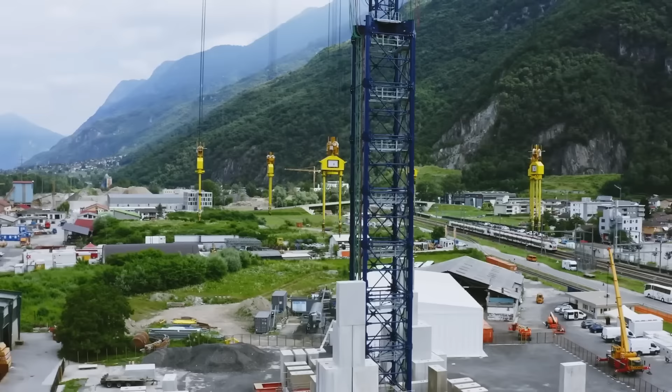We really wanted to innovate in a way so when you combine with wind and solar, you could actually be competitive and even cheaper than fossil fuel. And this really drove a lot of our innovation to come up with a combination of conventional physics technology for speed with some of the latest innovations in AI, software, and material science to create an energy storage breakthrough.

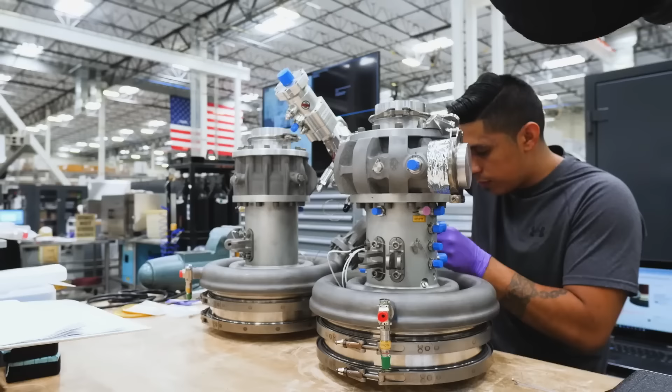A global technological revolution is underway. We think in the next 10 years, you'll see more innovation than we've seen in the past 50. Driven by passionate, dedicated individuals intent on shaping a new world. I want to create something new. I want to create something that gives me the sense of creating new life. This is why I'm here.

A greener world. This is the last call to action, that we have to develop the solutions that are protecting our planet. A better world. I have a family, and when I think about the life I want them to have and their children to have, I want them to experience the world where they can travel and live without worry, and that gets me up and going every day.

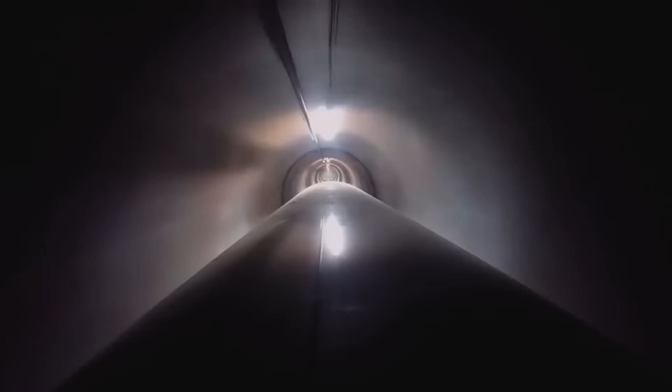Together, they are pushing engineering to its limits. Human creativity is the most tremendous power, and if you set a target, things that you never thought possible become possible. Creating extraordinary machines that can help the planet and humankind in the future.

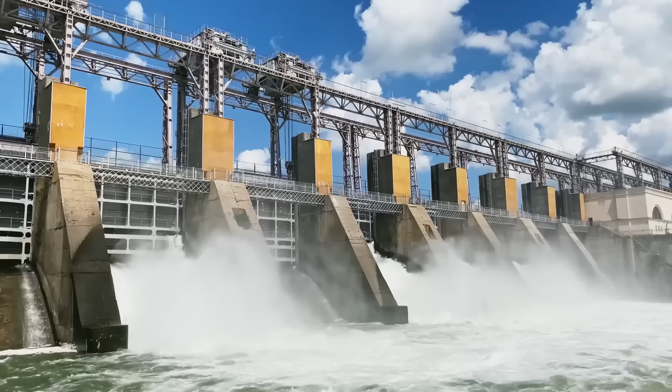Engineers are transforming the way we power the world, replacing old carbon-intensive technologies with clean, renewable sources of energy. And the speed of change is unprecedented. The energy transition that's happening at the moment is a complete paradigm shift.

Rather than big, centralized thermal generation, burning coal, burning oil, burning gas, we're now decentralized, solar PV all over the place. Wind and solar, which are now commonplace, really, they were almost non-existent. They were just a minority thing 20 years ago. But the meteoric rise of renewable energy has consequences for our electricity supply.

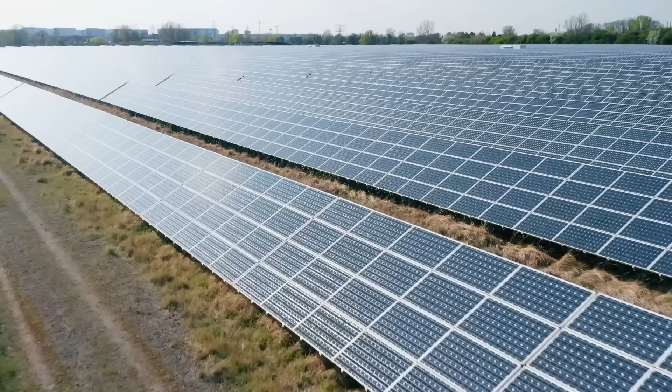While coal and gas-fired power stations can generate electricity whenever you need it, renewables are intermittent by nature. So we need a backup plan for when the wind stops or the sun goes down. So the solution to intermittent power provided by renewable energy is to provide power quickly using energy storage devices.

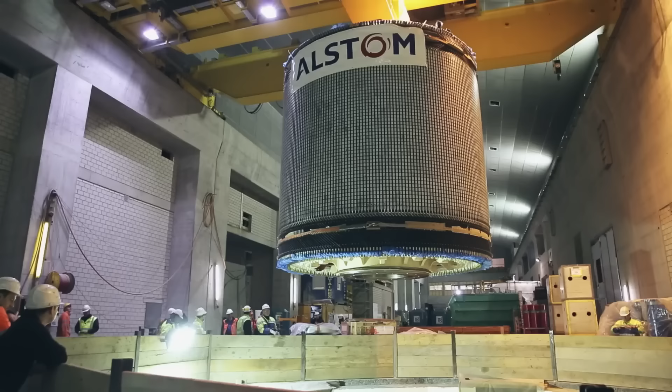Teams of engineers are searching for ways to store green energy with mechanical batteries, so that when extra power is needed, these devices can bridge the gap instead of relying on more polluting sources of electricity. The ultimate solution really is to have much, much more energy storage built into the grid, so that at times when there's a surplus of energy, such as when the wind's blowing very strongly and the sun is also shining, one can save energy and store it.

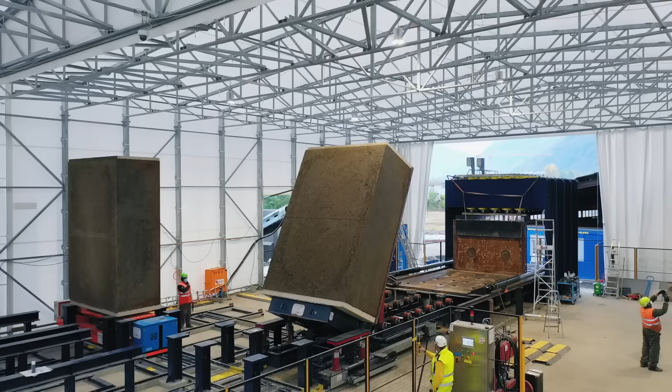We're going to need a lot of innovation for new technologies to be able to store this energy so that renewables can generate and we can utilize that when the grid needs it, when the demand is. The success of the green energy revolution depends on these engineers and their marvelous machines.

If we were to keep increasing the amount of renewables on the grid, but we didn't implement energy storage at the same time, our grids will start to get unstable. We'll start to have more and more frequently periods where power wasn't available to us. Already, there are ominous signs of what a future might look like without enough energy storage.

In August 2020, California was about to experience a glimpse of this potentially devastating future. The most extreme heat wave of recent decades was wreaking havoc on the western United States. Elliot Mainzer, CEO of the California Independent System Operator, was paying close attention to the weather.

August of 2020 saw a heating event that hadn't been seen in many, many years. It was simultaneously extremely hot in just about every part of the western United States, with temperatures well into the 100 degrees in California and in many parts of the region. It was what we've referred to as a heat dome that sat over basically the entire western United States.

Then, sweltering Californians were suddenly confronted with another rare event. From 6:30 p.m. on the 14th of August, their electricity was suddenly cut off. It was the first time that California had experienced any types of rotating outages from a shortage of electricity in 20 years. This shortage may seem surprising, as California has invested heavily in green energy generation.

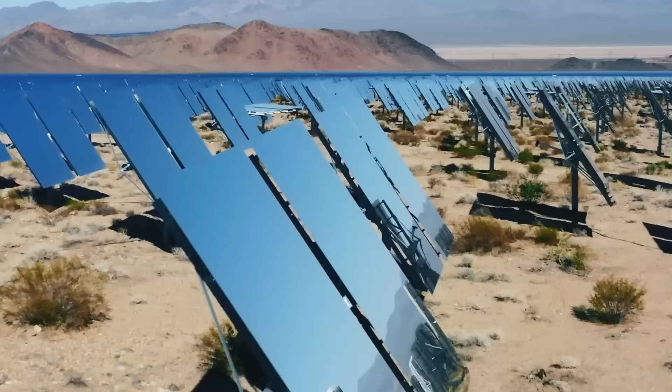In fact, during the spring, they have so much solar power, they export it to neighboring states. California is, first and foremost, very blessed to have a very significant solar energy resource. We have over 15,000 megawatts of solar operating on the high voltage grid, and also behind the meter, a lot of rooftop solar in California.

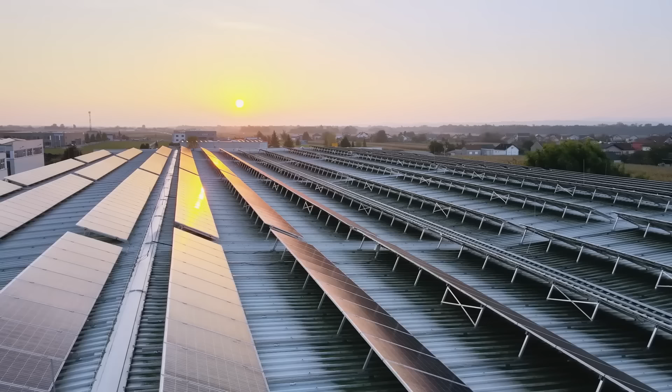So, with enough solar panels to power nearly every household, why did California run out of electricity during a heat wave, when there was plenty of sunshine? The answer was all in the timing. As the sun went down, power-hungry air conditioning systems stayed on, so the supply of solar power fell while demand for electricity remained high. In the evenings, California often imports surplus electricity from neighbors, but this time, they couldn't rely on other states.

It was so hot in these other areas that they needed that electricity for their own customers and didn't have as much surplus to sell into California. And that put us into a really stressed situation during a time of the day when we simply don't have enough capability to ride through those types of conditions. Planned energy shutdowns were the only solution. The result was hours of blackouts for 2 days, affecting nearly 500,000 people.

If California could have stored more of the solar power generated during the day to use in the evening, the crisis could have been averted. When solar panels produce more electricity than is being used by homes and businesses, the surplus energy can instead charge batteries. Then, when solar panels are generating less power than is needed, the batteries can discharge their electricity to the grid, making sure there's always enough for everyone.

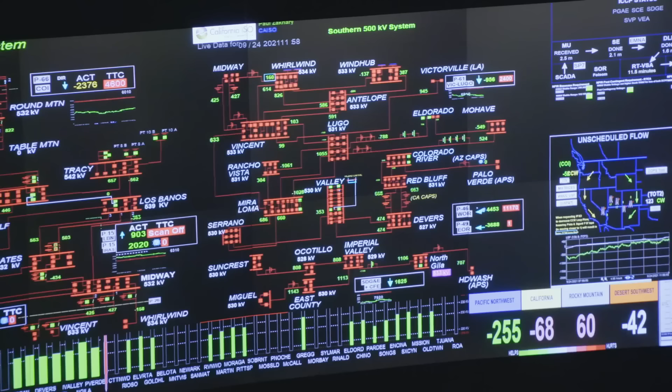The state's capacity has increased tenfold to 2.5 gigawatts. But Los Angeles alone uses 6.5 gigawatts. And lithium batteries can't provide power for long enough to get through the night. We are going to need longer duration storage. You want a diversity of supply. You don't want to have such a dependence on a single technology.

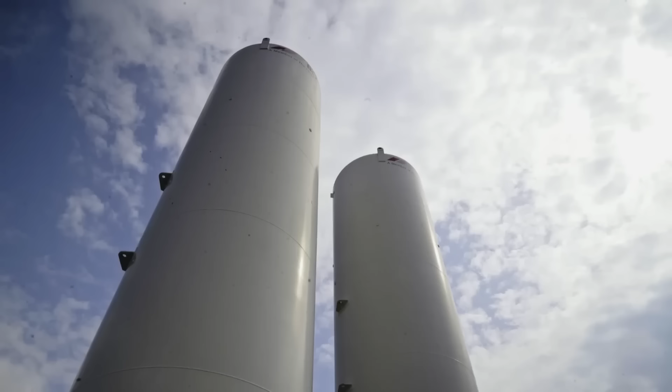California is ahead of the curve. But all over the world, renewable energy is growing fast. Without a revolution in energy storage, the world faces mass blackouts. Electricity grids need energy storage that is cheaper than fossil fuels to be competitive. They need them to be long-lasting to provide power for days or even weeks. They must also be fast-reacting to respond rapidly when the demand spikes. But above all, they need to store vast amounts of energy to help the world switch over to renewables.

One nation that's attempting to build a giant energy storage system is Switzerland. The Alpine country boasts over 600 hydroelectric plants. But this know-how in capturing energy from water is being taken to the next level here at Limmern Dam, to build a huge water-powered gravity battery known as a pumped storage plant. Deep inside the mountain, a turbine hall will connect Limmern Dam to Lake Muttsee, 1.5 miles above sea level. A 2,000 feet difference in height between the two reservoirs will allow them to store energy.

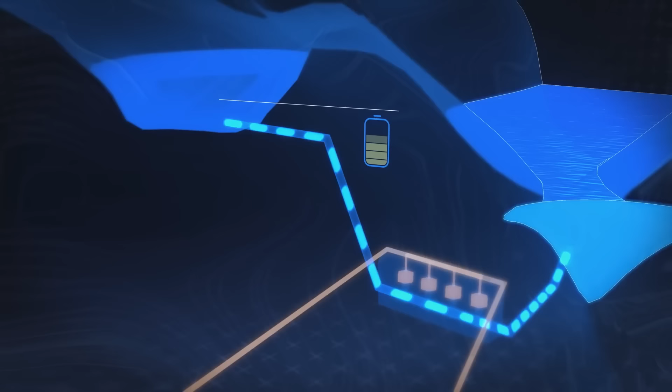When there's surplus electricity available, the gravity battery can be charged by pumping vast amounts of water upstream to fill up the lake. The gravitational potential energy of the water in the upper lake can be released to generate electricity whenever it's needed. The pumps will then rotate in the opposite direction, acting as turbines, generating electricity and sending it to the grid. The engineers aim to generate enough electricity for the Limmern Dam to supply up to 1 million Swiss homes at peak power.

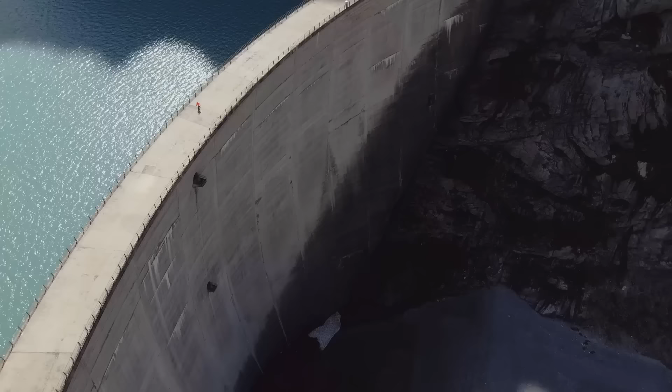In January 2010, energy company Axpo started building one of the biggest batteries in the world. The project would be one of the most ambitious engineering feats ever attempted at such a high altitude. Overseeing the construction of this vast pumped storage plant was project manager Martin Hussler. This was a huge work which has to be done with a maximum of 700 people here, and they work together. It was a huge construction site.

With no road access permitted to this protected part of the Alps, the engineers had to find a solution to lift all the necessary building equipment to the top of the mountain. So the team built 2 cable systems, each spanning just under a mile, that could lift the equipment at 10 miles per hour.

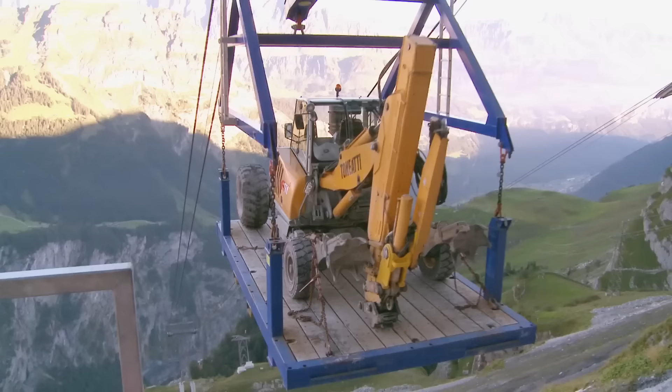We had 2 aerial cableways. The first cableway has a capacity of 40 tons, and the second cableway has a capacity of 30 tons. And all the machinery was taken by the aerial cableways to the Lake Limmern and to the Lake Muttsee.

Next, they had to dig through a wall of rock to the center of the mountain. Boring machines excavated a 2-mile-long access tunnel through which the team could bring the equipment from the top of the cableway. Then the team used explosives to excavate the caverns before collecting up the rubble to make concrete for the project.

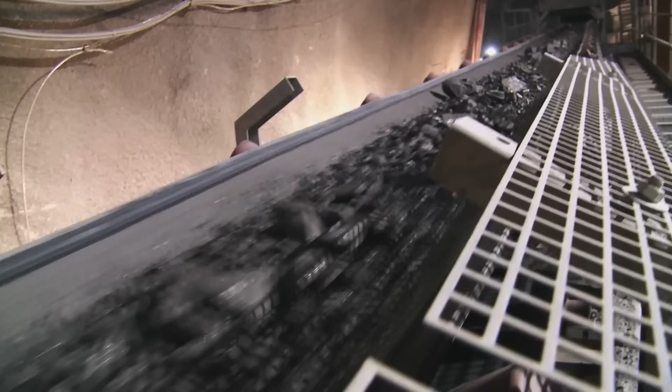The rocks were excavated from the caverns, were crushed and prepared for the concreting, because this was the main material for the concreting of the liner in the cavern. The builders produced enough concrete to build 700 suburban homes, and even more concrete was needed for the dams.

Most of this crushed stone was transported with the aerial cableway to the Lake Muttsee and was used for concreting of the gravity dam. This structure will be the longest in Switzerland, and it will triple the capacity of the lake. The altitude of the dam is 2,500 meters approximately, and this is the highest in Europe. So this was also a logistical challenge.

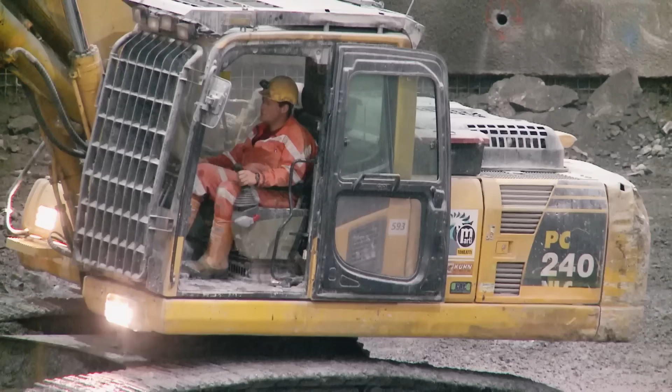The team had to excavate 2 main caverns out of solid rock. A powerhouse cavern for turbines and generators, and a second cavern to house the transformers. Then they had to line both caverns with concrete and build arches to reinforce the structure to withstand the weight of the mountain above them.

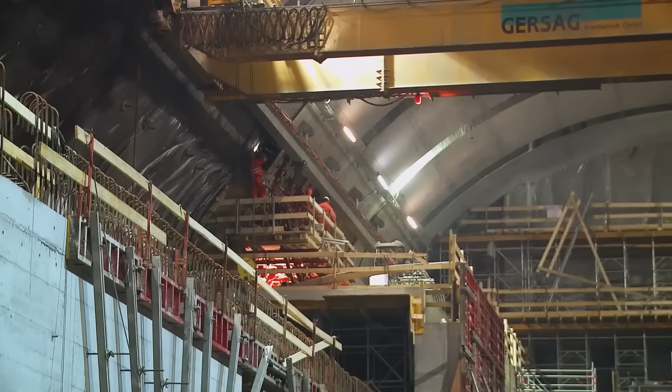The whole plant, with all the tunnels, was approximately 400,000 cubic meters. And as a comparison, our main cavern is approximately 15% larger than the interior volume of St. Paul's Cathedral in London.

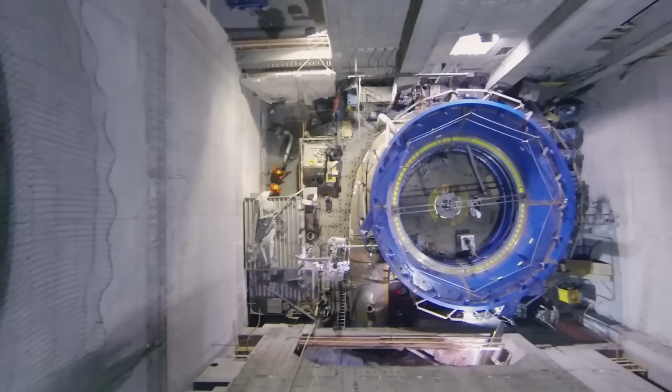The cavern was finally ready for the transformers to be installed, but there was an issue. They weighed over 200 tons, which was too heavy for the cableway. The solution was for the engineers to fit a funicular rail system into an access tunnel, which could lift up to 220 tons. Then the team built 4 pits for the turbine and generator units. These would weigh too much for even the funicular, so instead they meticulously assembled them in situ.

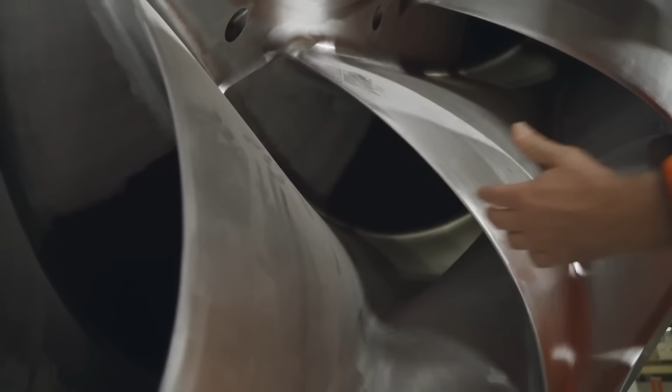First came the enormous pump turbines. As these blades rotate, they transform the kinetic energy of the water into rotational energy. The runner has a power of 250 megawatts, and its design has 9 blades. And in pumping operation, the runner turns in this direction, and the flow goes through these channels and goes to the Lake Muttsee to store energy. This allows to fill Lake Muttsee in about 40 hours.

In turbine mode, the water is coming from the Lake Muttsee, going through these channels, and the water flows through this channel out and is going to the Lake Limmern. And for all 4 runners, we have a total discharge of 160 cubic meters per second. That's enough to fill 4 Olympic swimming pools every minute.

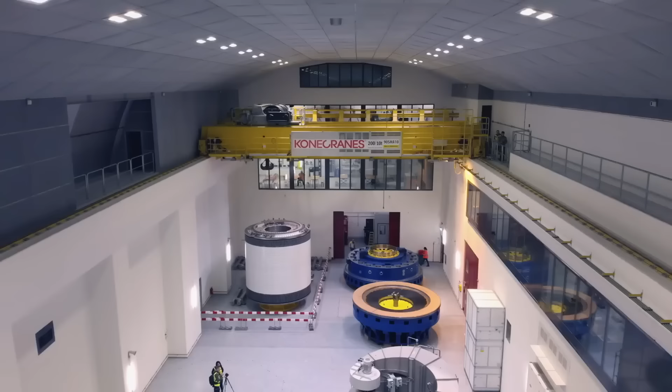The feeling after we have successfully done the project was great, of course, because this is a huge project. It takes a long time to fulfill all these requirements, and we are still working on it. It can now provide a massive 1 gigawatt of power on demand, the equivalent of a typical nuclear power plant.

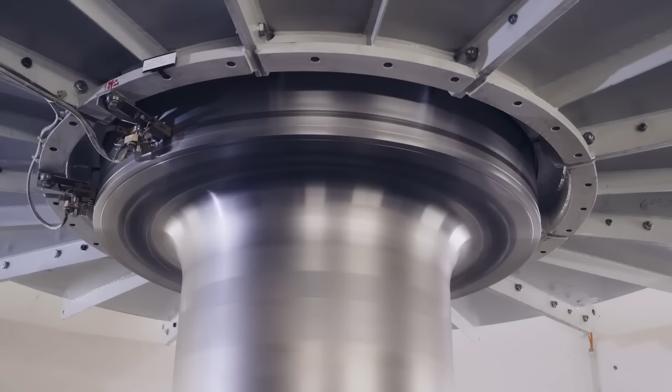It is very important to have this pump storage power plant because we are able to store a large amount of excess electrical energy produced by solar and wind power. The Limmern Energy Storage Plant can provide Switzerland with green power even when the sun or wind drops.

Pumped storage gravity batteries like this were first developed here in Switzerland in 1907. Today, they're the leading form of energy storage worldwide, with some of the biggest in the US and China. But they take a long time to build. So as renewable energy grows rapidly, other solutions will be vital.

Pump storage is near its limits now for several reasons. The main reason, of course, is that you need a convenient mountain, and convenient mountains usually don't exist anywhere near centres of population where storage is most needed. It also has other problems in that most pump storage systems are quite slow response. To get a lot of water flowing takes time.

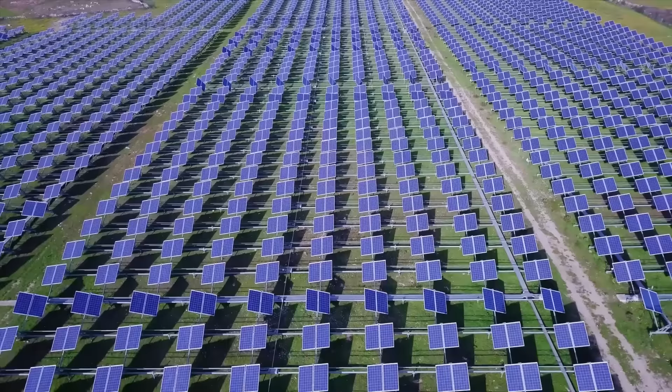So some of the grid services which are needed demand something which can respond in under a second, for example, and certainly a pump storage system can never do that. The supply and demand of electricity can change very suddenly, such as the power from a solar farm when a big cloud drifts overhead. So in order to keep the grid stable, engineers must build systems that can respond rapidly.

Inventor Peter Fraenkel is a pioneer of renewable energy, creating novel wind turbines and the world's first commercial-scale tidal turbine. So he's well placed to understand the need to solve this problem.

I decided I'd like to get into energy storage, and I was looking around for some clever way of ideally using mechanical engineering of storing energy.

Peter was fascinated by the mechanism inside a grandfather clock in his home similar to this one, a family heirloom. Basically, it has some very heavy weights, and those weights, under the influence of gravity, would like to fall down, but they can't because they're hanging from wires connected to the mechanism. So if I put the key in and wind the handle, this slowly raises the weights, and the energy from my muscles goes into the weight, and the weight then will be energized, basically, and ready to return the energy to the clock.

This clock is 300 years old, and actually you could leave these weights for another 300 years if you did nothing else, and no energy would be lost. But if we start the clock, so the pendulum swings, now the clock has started to tick, and both the weights, in fact, will slowly descend. So, you know, it's an incredibly durable form of energy storage.

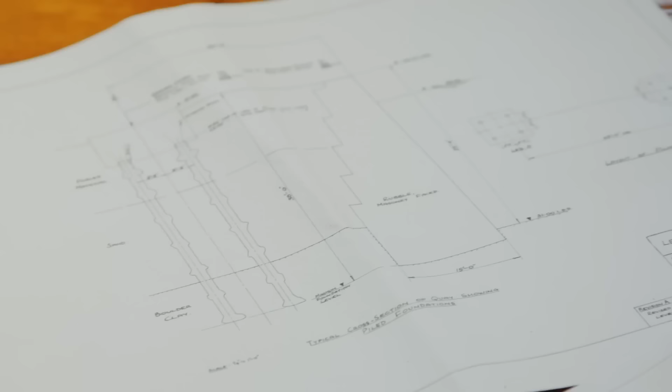Peter appointed engineer Miles Franklin to oversee the project in Scotland, as he had to self-isolate in London. To store a lot of energy, you need either a lot of mass or a lot of height. So in order to get to very interesting levels of energy storage by lifting masses, it's good to go down. It's also then, once it's underground, it's hidden. So you can do it under a city, under a football pitch, wherever you liked, in order to store energy, and then without having problems with wind and weather and all these other things.

And so we started to look at both existing mine shafts that are no longer being used for mining, and also the idea of sinking new shafts specifically for energy storage.

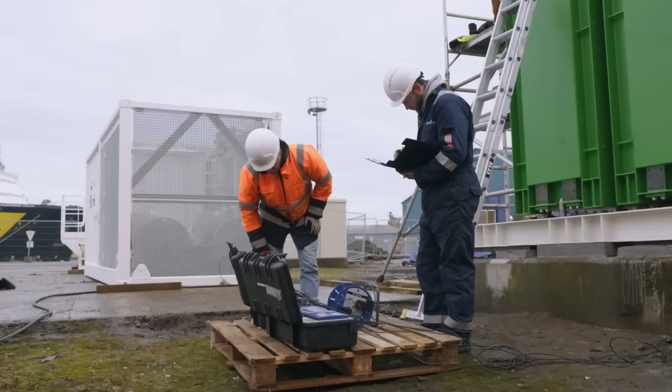Before going underground, Miles was in charge of building a tower prototype to prove it could provide power rapidly. The team filled 2 steel containers with over 50 tons of high-density ballast. This would store energy when lifted up and release it when lowered down. The 30-foot tower was then lowered onto the containers and secured.

There was some scary moments along the way when we're moving very heavy things and lifting them, so there's a sigh of relief when they're all in place.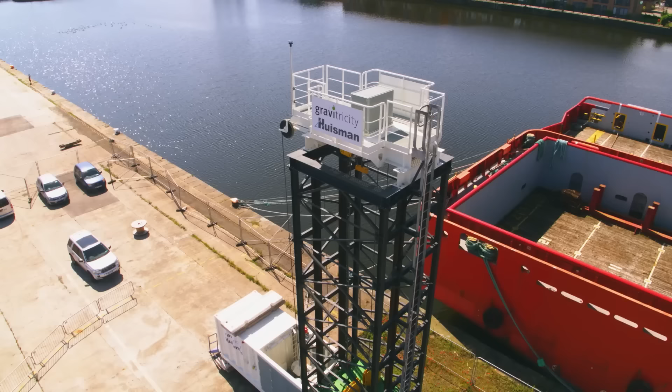Once it was all assembled, they were ready to store energy for the first time. We got to the moment we were going to lift the weights. We had quite a lot of the engineering team on site. So yeah, there was some tension.

They used power from the grid to raise the weights and charge the system with energy. For that lift, it's the first time that the whole structure is supporting the weights. And you'd expect, as you lift, some strange noises as the structure kind of finds its place.

When the weight reaches the top of the tower, the system is fully charged. We can stop, we can pause, we can hold that energy for as long as we want. But how fast can they return power to the grid when it's needed?

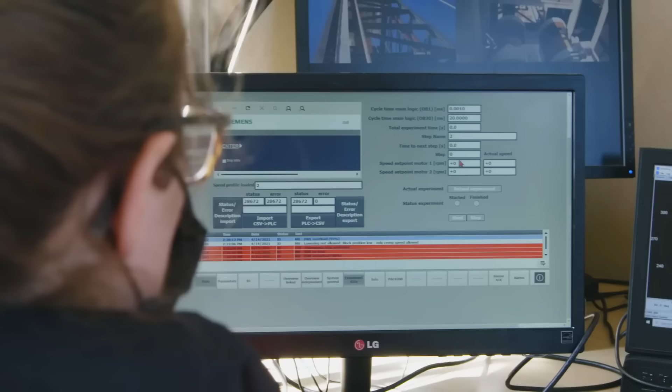Senior test engineer Jill McPherson knows how important that is. Right now we're going through a transition from using fossil fuels towards using renewable energy to generate electricity, but that means that the grid is less stable. With conventional power, we have these big generators that provide a lot of stability to the grid, but with renewable energy devices, they don't really provide that.

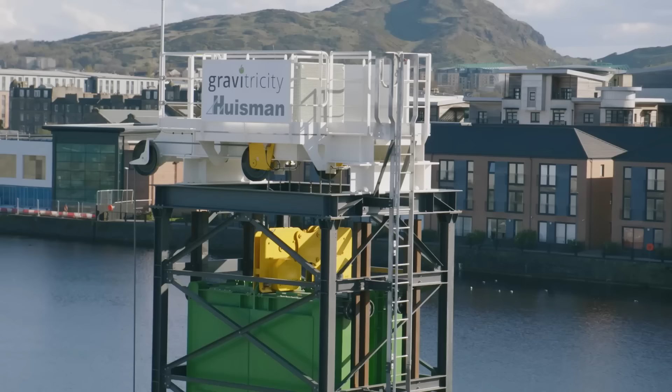Sure, we wanted to be able to go from 0 to full exporting power within a second so that all the devices on the grid can operate safely. All systems are go.

To generate power back to the grid, the weight is lowered, which pulls down on the steel rope, turning the winch, and then via the gearbox, turns the motor. The motor acts as a generator, putting power back into the electrical cable via the power electronics, straight into the grid.

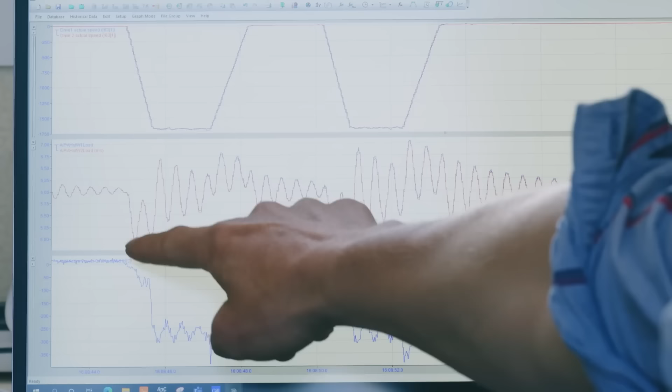The tower had successfully generated electricity, but for the first few seconds, the power supply had fluctuated too much. When we accelerate really quickly, the weight starts to bounce up and down, and that bouncing weight becomes a variation in the power. So what we need to do is find solutions to accelerate really quickly but have that power output from our system quite smooth. We need to find some way to fix that.

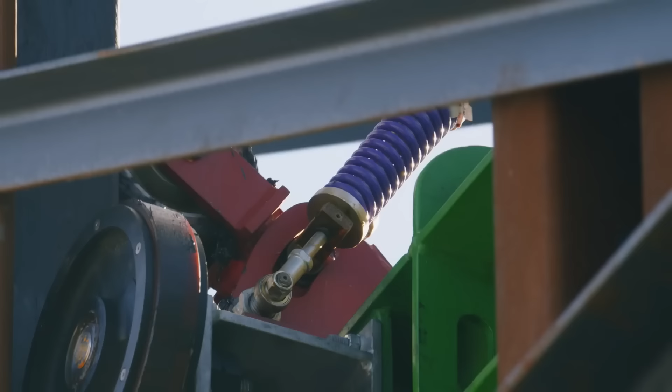The team must find a solution to generate a smooth power supply more quickly when the weight starts to drop. Although the concept may seem simple, smoothly lowering a weight of 50 tons in a fraction of a second involves intricate mathematical modeling. Analyzing the dynamics of the weights and the movements and then designing them is actually quite complex, and that was something that took us a while to get right.

One month later, Miles and Jill have a plan. After many simulations and tests, it's clear they think they've figured it out. Okay, so 3, 2, 1, go.

If we want to go from 0 to full power but have smooth power at the maximum power, then what we could do is apply a force that cancels out the tension oscillations in the cable, and that corresponds to smoother power.

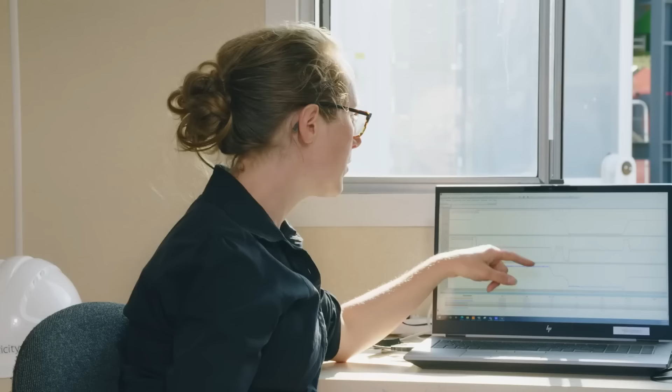To find out if it produced a useful source of power in under a second, they must analyze the results. In this last set of tests that we just did, you can see that the power is much more smooth, it's a straight line, and that's what we're looking for. We went from 0 to full power in 0.96 seconds.

Gravitricity's prototype has proven it can respond rapidly to the demands of the grid, a significant improvement over pumped storage, which can take minutes.

In July 2021, Peter Fraenkel was eventually able to make the long journey from London to Scotland to see the tower for the first time. A bit better than a grandfather clock, yeah. It doesn't have such a nice face on the top of it, but yeah.

Now that this prototype has proven his theory, Peter has big plans for the next stage of his energy storage system. In the near-term future, I think we're looking at initially systems a few 500 meters deep and 6 meters diameter. So it's like a railway tunnel turned on its side, vertically.

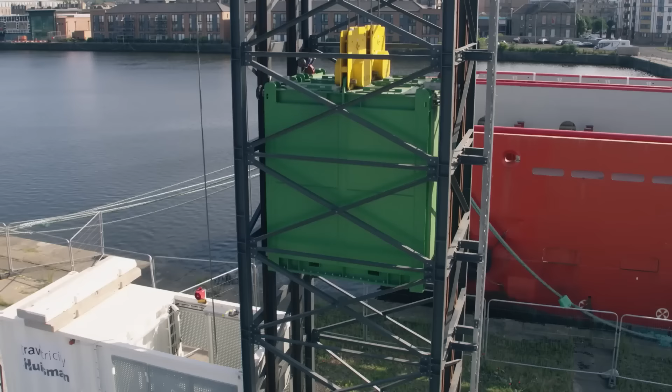We hope and expect that gravity-based energy storage of the kind that we're trying to develop could have a massive impact in terms of facilitating the wider use of intermittent renewables. A typical system would store enough electricity to supply 13,000 homes for 2 hours. Gravitricity hoped to build their underground mechanical batteries all over the world to store green energy.

Meanwhile, back in Switzerland, a startup called Energy Vault are building another type of gravity battery. The goal is to store energy as cheaply as possible.

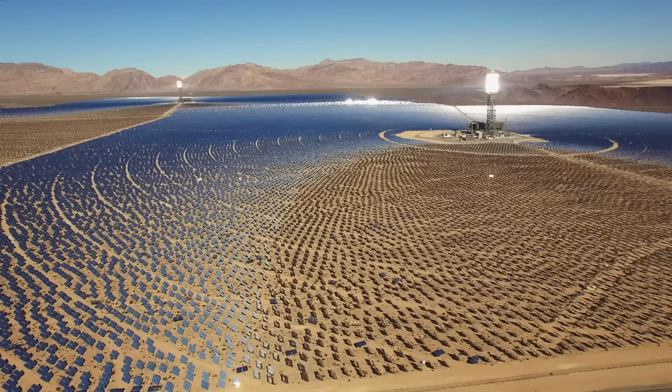CEO Robert Piconi understood that the only way to move to 100% renewable power was to undercut the price of electricity generated by fossil fuels. You have to be able to essentially compete with something that's about 5 to 6 cents a kilowatt hour. And the good news is solar and wind now is just a few cents, 1 to 2 cents a kilowatt hour, so the economics really work there. You therefore have to target storage that must be between 3 and 4 cents to have something that is at least on parity with fossil fuel, and therein lies the challenge.

To meet this challenge, the team came up with a specific design: the Energy Vault 1, a crane with 6 arms that could lift heavy bricks and stack them on top of each other to store energy.

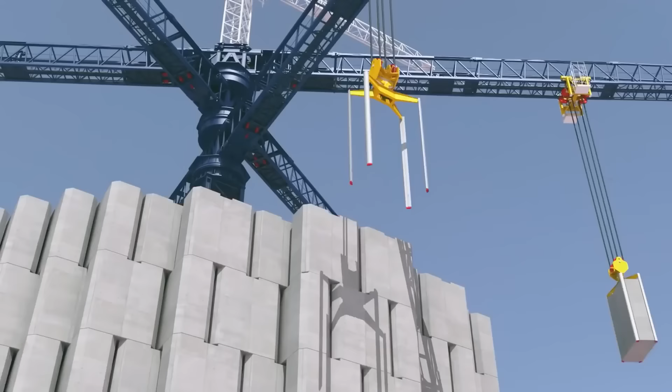Then, to release that gravitational energy, the cranes lower the bricks back to the ground one by one. By building a tower made of thousands of heavy weights, they could store large amounts of energy and therefore bring down the cost. And by using mostly tried and tested machinery, they could build it quickly.

But first, they had a thorny issue to tackle. So they built a quarter-scale system to try and find a solution.

The problem is that when heavy objects are lifted by a crane, they can swing like a pendulum. One of the main challenges we have in utilizing the system to move large objects is the environmental impacts on that object in movement. It's a very important problem when you're moving large things like containers at ports, where cranes moving them will sway and impact the ability to precisely place them. When we're moving around 35 metric ton bricks that we have to stack at height, it's very important that we be quite precise. So that was one of the major challenges, to solve for this pendulum effect.

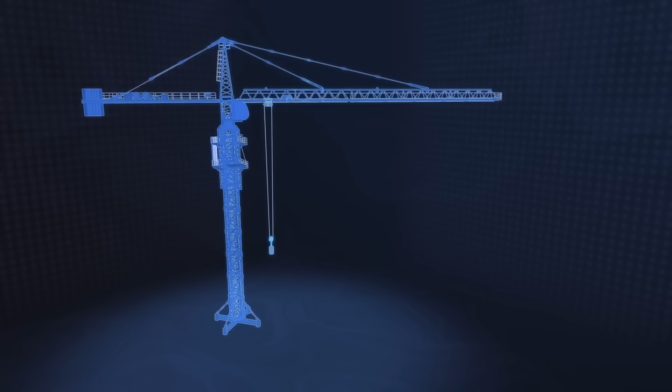When the trolley on the crane moves along the arm, the weight below starts to swing back and forth, making it almost impossible to precisely place the weight in its new position.

We had actually thought that the crane industry had solved this already for the movement of things in the ports and these large containers, but as we talked to other partners and suppliers in the space, it hadn't been solved, so we had to develop the algorithm ourselves. It's a very important algorithm because it's not only necessary for the precision placement of the brick, but also to deal with any unpredictable weather events, like a high gust of wind. So this was fundamental that we use software to solve this.

So we took concrete barrels and utilized an existing crane that we modified to test the ability of software to cancel this pendulum effect.

As the test began, an AI control system could predict how the weight was about to sway. It then instantly adjusted the movement of the trolley to cancel it out with an equal and opposite motion.

One of the most fascinating things is to focus on the trolley and see the back and forth movement at high speed so that the concrete barrels maintained consistent velocity. It's amazing to see that software at work, manifesting itself from the modeling to reality.

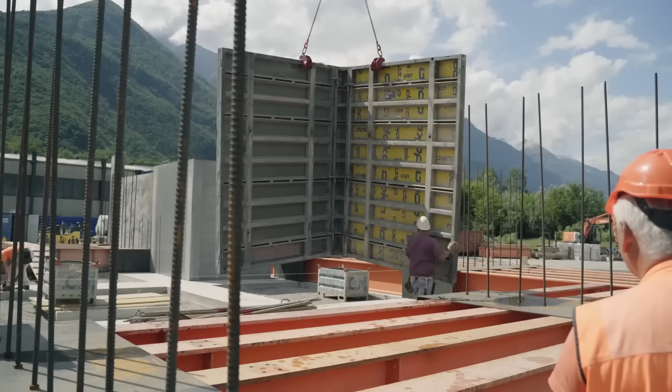In January 2021, work began on building the full-size crane. But this would be nothing like the cranes you might see at a construction site. After laying extremely strong foundations, the team assembled and secured the 7 sections that made up the 660-foot-high tower.

In the meantime, another team assembled the 3 rotating platforms called jibs. Just one jib of the crane weighs 130 tons.

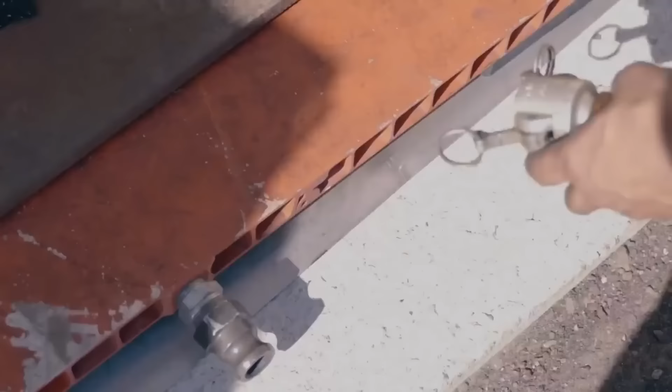So just to construct it is one thing, but then to maneuver it around the site, we had to use a special horizontally designed hovercraft system that could maneuver and shift it from the shelter where it was constructed to a location where the crane, the 600-ton crane, could be attached to that system and lift that jib up so it can be constructed onto the crane itself at height. Just fascinating and amazing, and a great job by the team to pull that off.

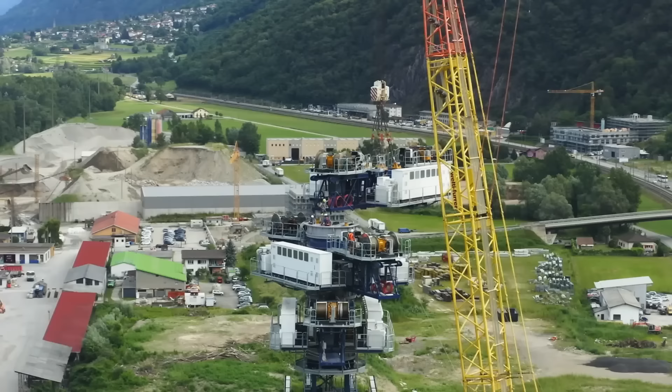The crane stacked the jibs on swing bearings on top of each other so they could turn independently. Once in place, it was time to assemble the arms which support the transport trolleys.

Having enough arms of the crane with enough megawatt motors per arm, you could generate up to 5 megawatts of power and be able to essentially discharge that over a period of time, at least 6 hours, but ideally up to 8 to 12 hours, in a way that could be reliable.

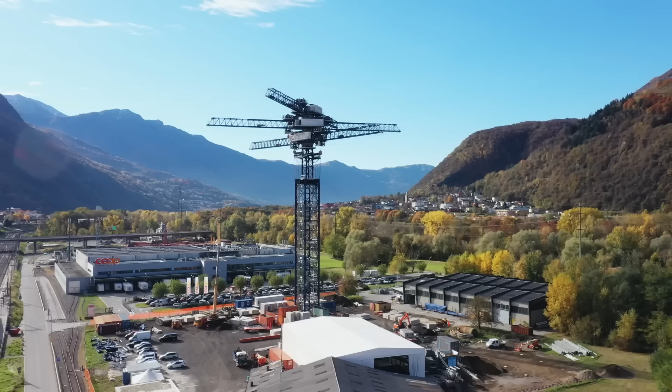While the multi-armed crane took shape, Rob faced a dilemma over how to make the 35-ton bricks in a way that was both cheap and environmentally friendly.

So normally, as you think about making any dense weight object, one of the easiest materials to use is concrete. The problem for us with concrete was many things. It was too expensive, and it was also bad for the environment. Concrete production still represents 7 to 8% of greenhouse gases. So this again required more innovation for us to solve that problem.

They wondered if the solution might be a low-cost, plentiful material available at almost any site. Soil.

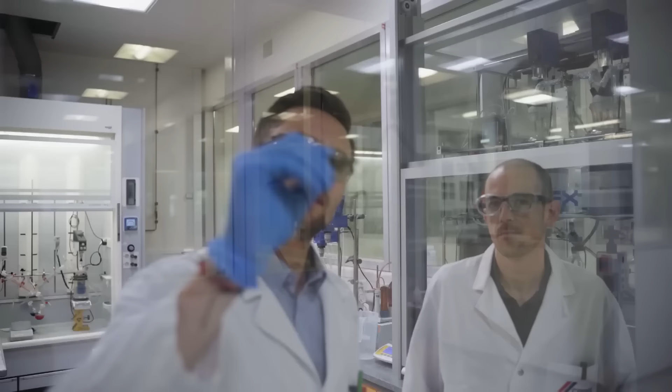So Energy Vault approached a specialist in building materials, Cemex, to develop and manufacture their bricks. We had been working already on soil stabilization for some time. There are a lot of places where there are plans to develop networks of roads, sometimes in very difficult places. The easiest way we thought was to be able to take just the soil there, dig it out, compact that material, and give it the ability to solidify.

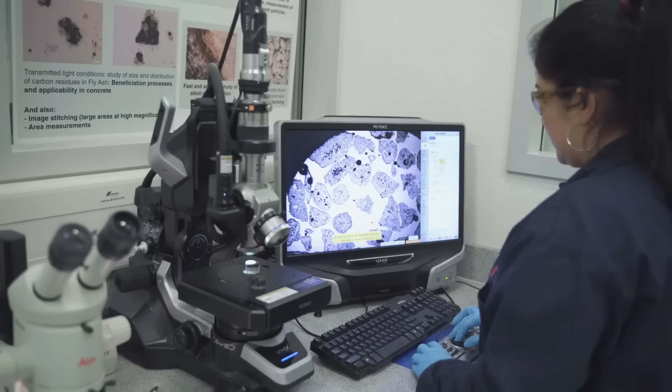To make the bricks, head of R&D, Davide Zampini, would need to adjust their process to make them even tougher. These blocks have to be designed to last 25 years or more, and the conditions that the blocks would be subjected to are highly variable.

I mean, you can have places where it's very hot, very cold, wind. These blocks are being lifted and put down, lifted and put down. So they go through a lot of cycles of stress.

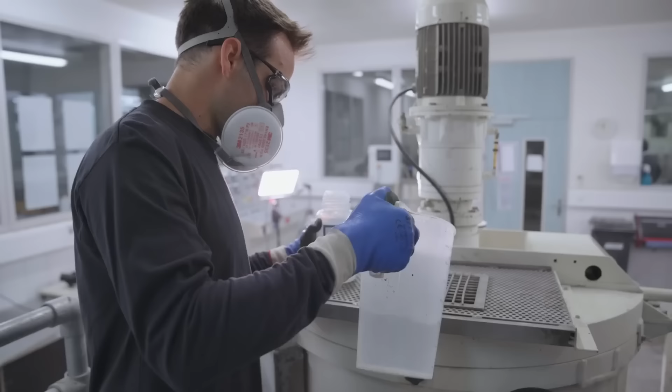Cemex came up with a mixture of soil, water, a small amount of cement, and two crucial binding components. First, a chemical glue. In terms of the strength, it has a lot to do with our chemical admixtures. Creates a strong binding element, what we call like the mineral glue of the block.

The second component is glass fibers. Fibers are actually incorporated as a means to arrest any initiation of a crack that could take place. What we do with the fibers is make the material highly resistant, especially when it's under tension.

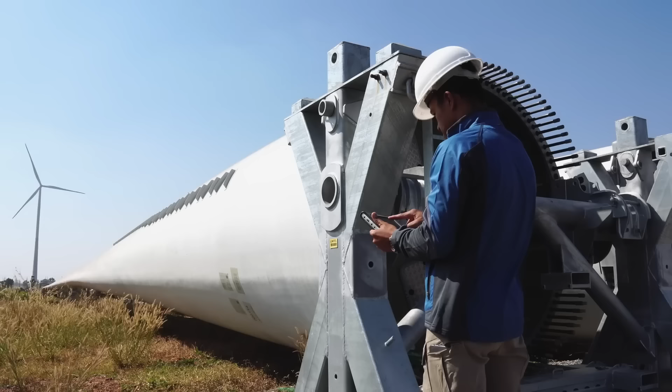Cemex are now investigating an alternative source of fiberglass that could be even more environmentally friendly. Today we're looking at recycling the blades of windmills that create energy, so it's interesting now that the same element that is creating energy has to be obviously decommissioned, and we can recuperate the blades and process that material and actually incorporate it into the blocks.

This mixture is greener than concrete as it contains much less cement and avoids the pollution caused by heavy transportation. And crucially, it's also cheaper, which ultimately means a lower price for stored energy. But to make the bricks strong enough to be stacked 500 feet high, they needed one more step.

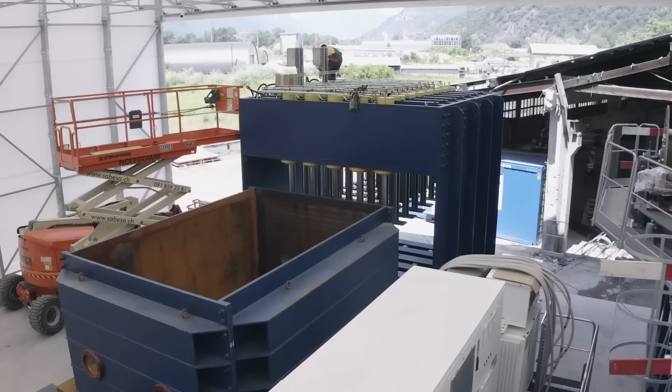When you are paving a road, you use a roller compactor. And here, actually, we said, okay, we would use the same approach because compaction is the best way to densify and make a material strong. But we needed to process the material in a different way.

And that means we had to find a way to compress the material as much as we can, because the compression and the way the chemicals work further elevate the strength and the densification properties of the material, which are required to have the block survive those different conditions. The pressure is applied by a custom-built machine with 40 powerful hydraulic pistons.

You need a compressive strength of almost 7,000 tons. If you think about the weight of a car that's about 1.5 tons, and you were to stack the amount of cars needed to generate 7,000 tons of force, that stack of cars would be as high as Mount Everest.

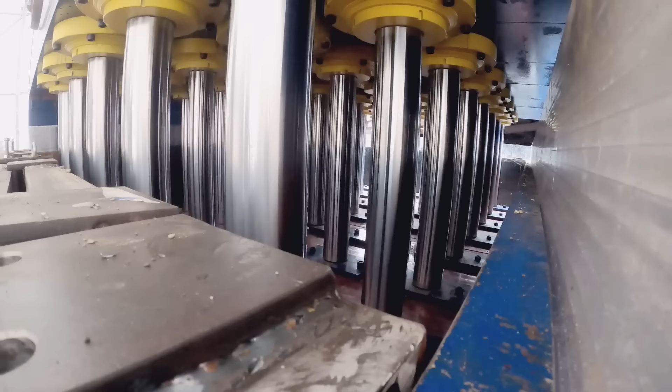After 10 minutes of this immense pressure, the bricks are good to go. Once part of the system, each one will be capable of providing a megawatt of electricity while being lowered by the crane, enough to power over 2,000 homes.

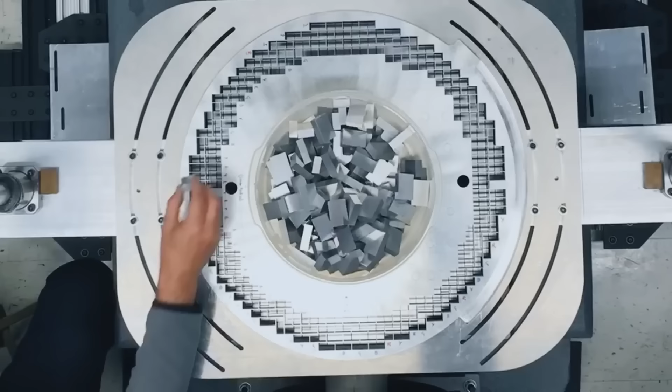But before they stack the blocks into a tall tower, Rob needs to be sure it will be safe in all conditions. One of the parameters in our design was to be able to build this at scale almost anywhere. But there are locations where there's a strong need for renewables that happen to coincide with some seismic activity, like in California. And because of that, we wanted to do another focus around research and science to deal with the occurrence of seismic events. Energy Vault teamed up with Caltech and UC San Diego to put the structure through its paces.

After some small tests, they built a 1:20 scale model, 50 feet high, 7,000 bricks carefully stacked on top of the biggest shaker table in the US. You can imagine the atmosphere in the room as we had the tower constructed and we're about to turn on the shaker table. A lot of anticipation. The giant shaker table precisely simulated the 7.1 magnitude Ridgecrest earthquake that hit California in 2019.

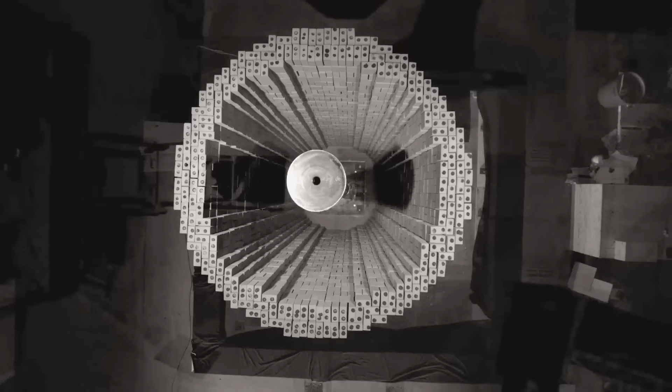As we got into the earthquake, what we saw is a vibrating of the system and a shuffling of these bricks, but the system never decoupled from the bottom and resulted in a full collapse of the system. Just this tremendous round of applause in the room because our software modeling and prediction was actually going to be correct.

So as we reconstructed the tower, we did hit it with a larger earthquake, the Denali earthquake, which is up in Alaska, that was a 7.9 on the Richter scale. Only a handful of locations around the world have experienced quakes as powerful as this. None in California have been stronger. While we were hoping that maybe it might withstand that level of earthquake, it did collapse pretty readily.

Nevertheless, the tests had proved the structure could withstand the vast majority of earthquakes, which many conventional structures couldn't do. The implications for science and civil engineering of the fact that you could have a discontinuous structure not connected with standard mortar that could respond in a seismic event and shuffle and move and dissipate that heat and energy from a seismic event and therefore withstand better than existing structures was just a tremendous impact we felt like we were having, well beyond even our energy storage structure.

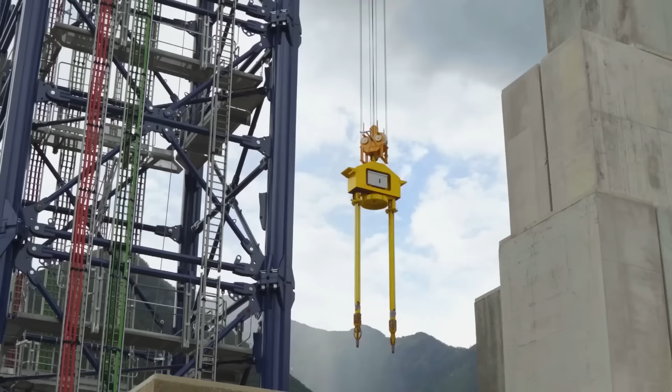With the safety of the system beyond doubt, the team were ready to stack the bricks. The holes allow the cranes to lift the bricks securely. Just amazing to see a 35 metric ton object coming off the ground and going at height 50, 60, 70 meters in the air. And not a new thing in terms of that amount of weight being lifted, but to have that done in an automated fashion and in a way that is going to be storing energy for the first time. So in this application, pretty cool to see.

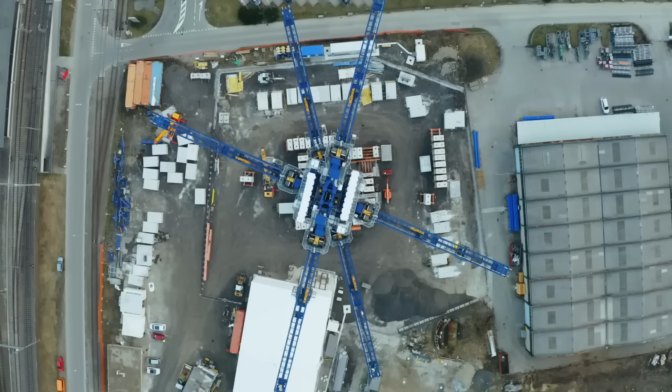Energy Vault expects to be able to generate electricity at a cost of just 6.5 cents per kilowatt hour by 2025, making it much cheaper than batteries and competitive with fossil fuel. The EV1 could be perfect for storing energy in the day and giving it back throughout the night. But we also need a way to store green energy that can generate power for days or weeks if the sky turns gray or the wind stops blowing.

Luckily, back across the English Channel, a company is engineering a new way to store energy that can provide power for longer periods. And instead of using gravity, they want to generate electricity from thin air. I like to think of it as an energy storage system which is a bit like pumped hydro, which is physically a very, very large system, but you can put it anywhere you like.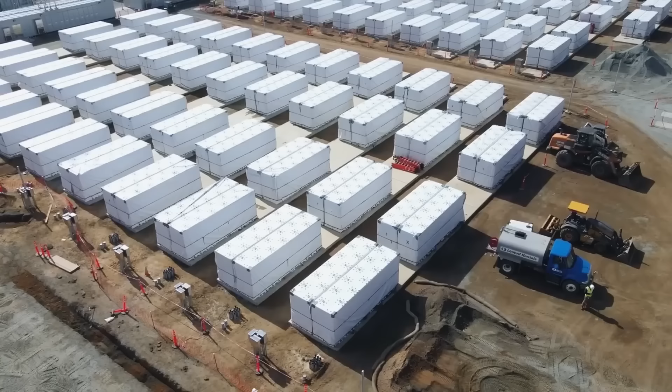Chief Technology Officer Gareth Brett has been developing the system at Highview Power for 12 years, working closely with Birmingham University in England. What we're looking for is economic means of delivering energy storage over a longer period of time than the typical electrochemical batteries. Lithium batteries typically provide electricity for up to 4 hours. Highview's goal is to store vast amounts of energy over a long period of time so they can then generate power continuously for days, weeks, or even months.

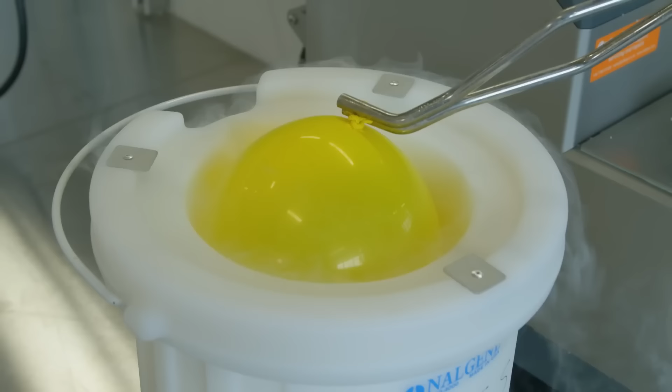To do this, they plan to store energy in the form of liquid air, which only takes up a small amount of space. I've just put some regular air into this balloon. In this white pot down here, we've got some liquid nitrogen. It's at minus 196 degrees Celsius. We're going to dip the balloon in and it will get extremely cold. And the air in the balloon will now start refrigerating. And you can see the balloon is collapsing.

That's because the air is getting colder, it occupies less volume, to the point where the air actually starts to turn into a liquid. So if we take that out, you can just see in the bottom, there's a little bit of liquid in the bottom of the balloon. It's about 1/700th of its original volume. As it warms up, it expands back into a gas. If we did what we've just done to the balloon to all of the air in this entire lab here, it would shrink down to a volume of liquid only the size of this little oven, which gives you a sense of how much air you can store in tanks by keeping it as a refrigerated liquid.

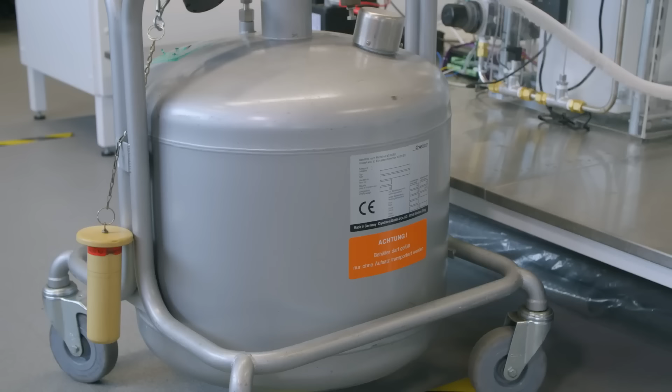When power is needed, the system expands the liquid back to normal air to generate electricity. This rig demonstrates how we get electricity back out of liquid air. So the liquid air comes up the pipe here. You can tell that the pipe contains cryogenic fluid because it's frosted up. And down into this white tank, and in there is a bath of hot water surrounding a coil of stainless steel pipework, and it gets evaporated back into a gas.

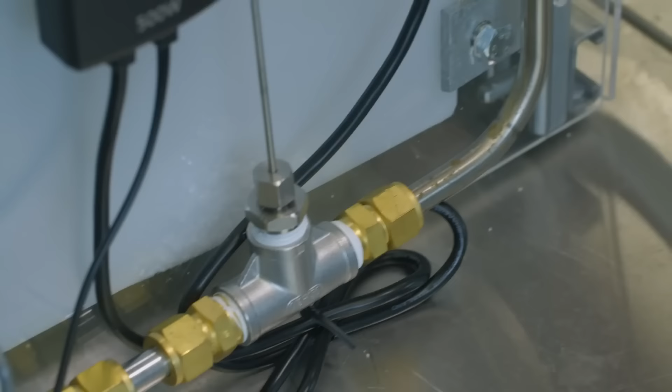As it warms, the liquid turns back to air, but at a very high pressure, as it can't yet expand in the pipes. So at this point, we've got gaseous air coming back up this pipe, and that feeds up along this piece of pipework and down to our little air motor. As the high-pressure air finally expands, the fast-moving gas drives a rotor to spin rapidly, which generates electricity. So we're turning stored energy in the form of liquid air back into mains power that we're using to drive the fan.

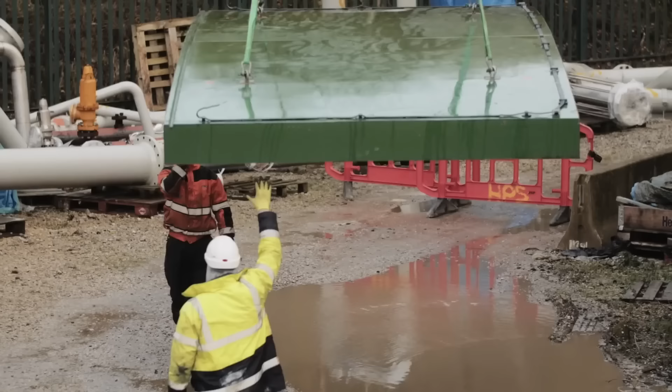In 2018, Gareth's team built a demonstration plant in Manchester, England, to prove the technology works on a commercial scale. It was a system that could use off-the-shelf components from major industries like the industrial gas industry, which is where we get our refrigeration systems from to make the liquid air, tanks available from the construction industry, and turbines and generators that, of course, come from the utility sector.

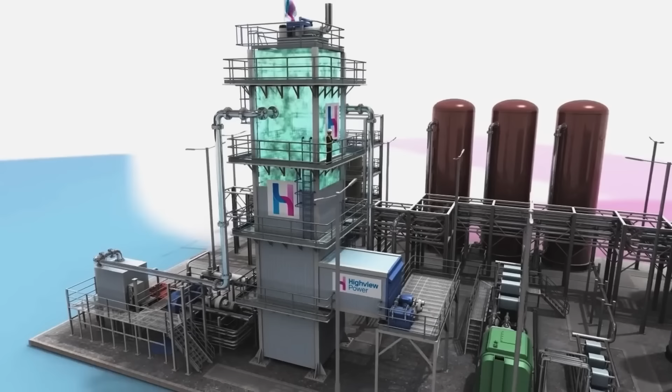At Highview's liquid air storage plant, air is cleaned up, compressed, and put inside a large industrial-scale refrigerator, where it is condensed into cryogenic fluid at -320 degrees Fahrenheit. The cryogenic fluid is then stored in large tanks, which can hold enough air to fill the Royal Albert Hall in London. To release power, the cryogenic fluid is pumped to a heater, where it evaporates back into a gas before driving a turbine generator to produce electricity.

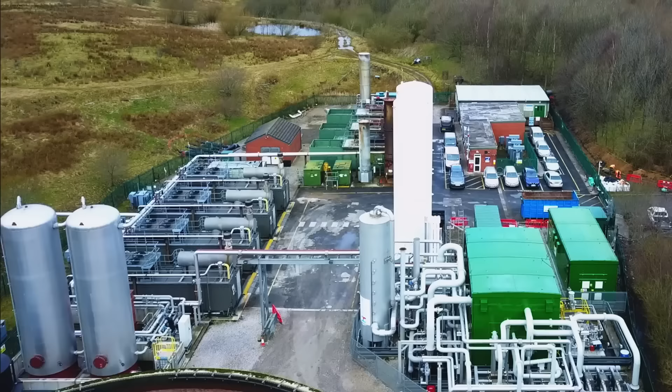The idea works in principle, but there's a fundamental problem: the efficiency. Refrigerating the air so it's cold enough to liquidize takes a huge amount of energy, and turning the liquid back to gas takes a lot of power to warm it back up. This means most of the electricity is wasted in heating or refrigeration, and only 25% gets returned to the grid. But Gareth's team relished the challenge.

One of the things that we've always sought to do is to improve the efficiency of the system. We hit upon the bright idea of, wouldn't it be a nice environmental thing to do, to not pollute the environment by dumping heat into it, but hold on to that heat and then use it later when we want to expand the compressed air, when we're generating electricity. The heat generated by turning the air into liquid is stored and later reused to warm up the liquid air.

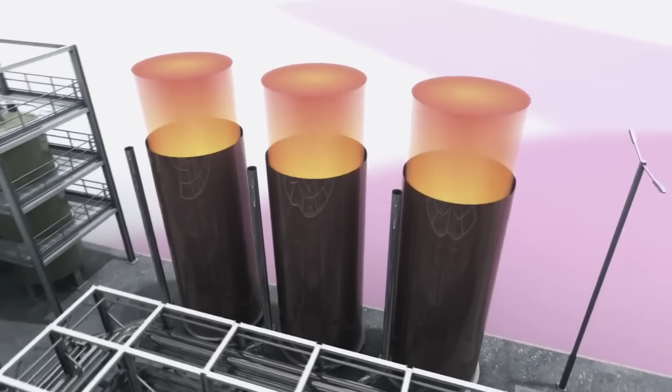But that's not all. The cold generated by evaporation is also stored and later used to chill the air that's being liquefied. When we're expanding that gas, we capture some of the cold that the cryogenic fluid had, and we feed that back into the refrigerator to improve the efficiency of the refrigerator.

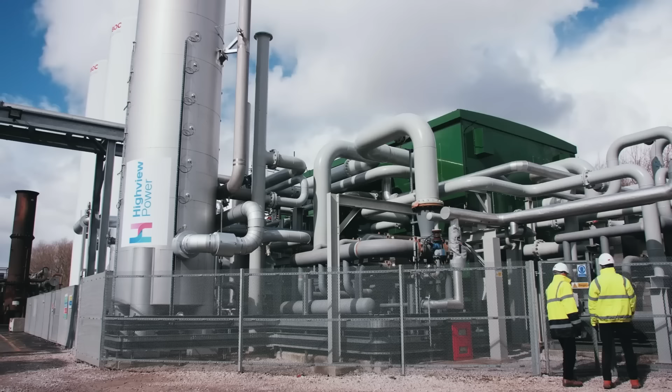Highview claimed that recycling the heat and cold boosts the efficiency hugely, to 70%, and that the system has other benefits. Highview, it's very kind to the environment. The working fluid is air. We take it, clean it up a little bit, store it for a while, then give it back. So no tailpipe emissions, no bad things used in its processing. It's about as good as it gets in terms of environmental footprint.

But the key to Highview's long-term storage and almost endless supply of power is their cryogenic liquid tanks. Javier Cavada is the CEO. These two columns that you see here, the white tanks, these are tanks that you find everywhere on the planet, in hospitals for liquid oxygen, in factories for liquid nitrogen, in houses, in industrial areas, totally commoditized. The ready availability of these tanks means it's cheap and easy to add more for a longer-lasting store of energy.

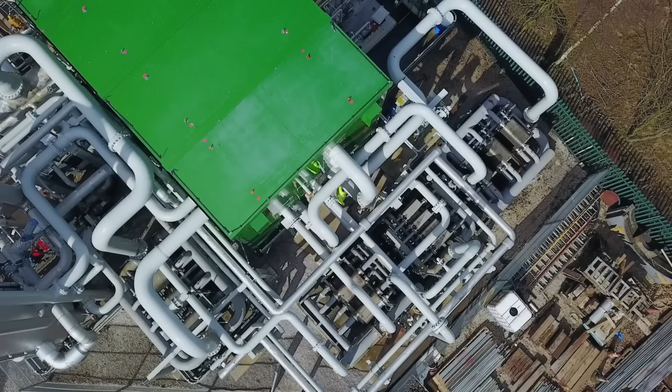If you want to add more duration, you just need to add more tanks, but you don't need to add a new charging station, a discharging station. The more energy you are storing, the lower cost you need to store that energy. The economies of scale of this technology are simply amazing. Even seasonal storage of power is possible, where surplus solar energy in summer could be stored for use during the long, dark winter.

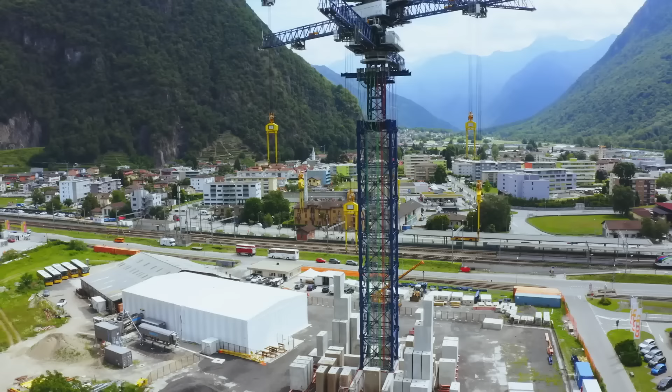Ultimately, electricity grids will need many different kinds of energy storage, depending on how much they need, how long they need it for, and how fast it must respond. I'd like to see Highview really widely deployed, but alongside other long duration and shorter duration technologies. So I'm looking for the broad adoption of energy storage, but not just that. I'd like to see technologies advancing, so we've got new competing technologies coming through that are better performing, cheaper, and quicker to deploy.

As we develop our full-scale systems, we really believe that can become part of this energy system as it changes and allow us to fulfill these big ambitions of decarbonizing our grids really quickly. The energy transition is going to be massive over the next 30 years. It is going to be in the trillions of dollars, and therefore accelerating the need for the innovation to be able to deploy different technologies to reduce the greenhouse gases. Make sure we can hit net zero in 2050.

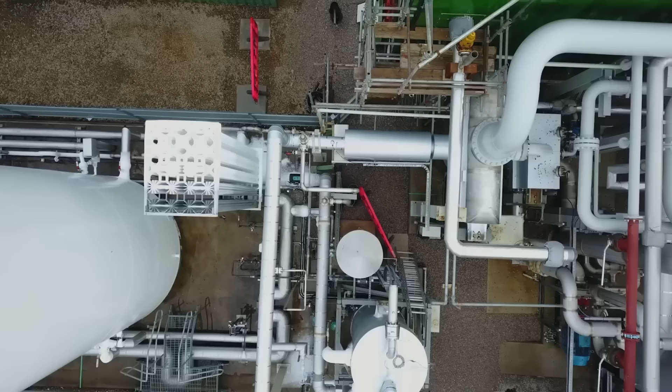That is still a gigantic challenge, but the more systems like ours that we deploy, the better the opportunity we've got of hitting those targets. Let's hope we can turn what looks like a train wreck into something that looks like plain sailing. By providing us with perpetual green power, these giant mechanical batteries could play a crucial role in saving the planet.